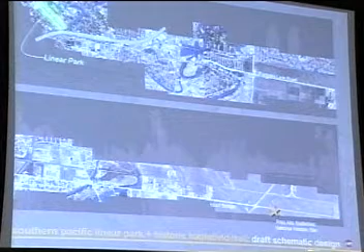There's the linear park. You can see it's right at the west side of the expressway. Then once you go through some curves near Vermilion and Boca Chica, it's pretty much a straight shot.

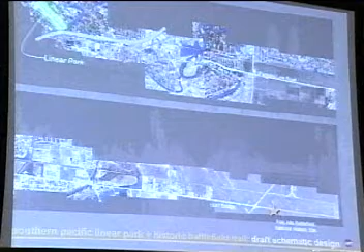The trail is a 12-foot wide paved trail that will allow for two-way traffic. It has an asphalt surface and accommodates bicyclists, walkers, joggers, rollerbladers, as well as skateboarders. It's an especially important project for skateboarders since they have very few legal places in the city where they can skateboard.

In the late 1990s, we had a young skateboarder, in the early evening hours, get hit and killed on Coffeeport Road. It will be very beneficial that we have a facility we can offer as a safe place for people to do all of those activities that I mentioned.

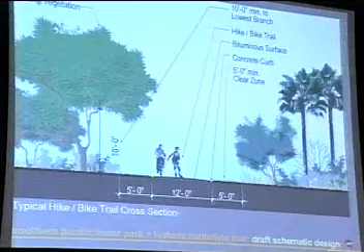This particular slide talks about a concrete curb. We deleted that detail. We will use herbicides to keep weeds from getting under the asphalt—Mr. Brown will explain about that a little later. There will be a 5-foot clear zone, and no shrubbery will be allowed to grow up right next to the trail.

These views show the rest areas. One of the things I need to mention is that the trail conforms to AASHTO standards.

All right, you've heard a lot of acronyms. This may be one to stump you. AASHTO is the American Association of State Highway Transportation Officials. I knew that one. You knew that one, okay. Well,

It's slowed us down a number of times in conforming with AASHTO. The WRT team member who has saved us time and again and helped us has been.

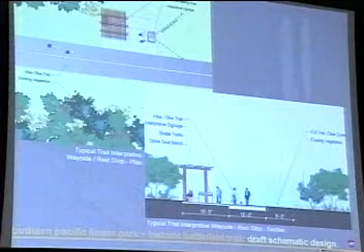I was going to ask you, are they here? WRT? Whoever the city hired? Yeah, the Wallace Roberts and Todd. Okay, the engineer is here. They're the design firm. All right.

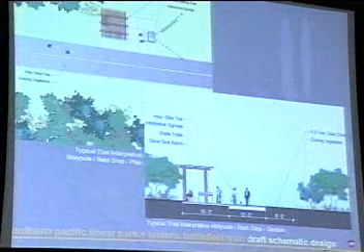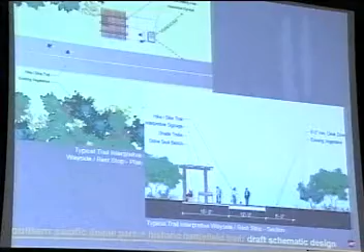But there's a good thing about AASHTO. Even though it has been slowing us down in terms of TxDOT checking for our compliance, it helps the city in terms of liability. In the event that we have an accident and there's a lawsuit, we can say that we have used the AASHTO standards in building this, and those are the recognized standards, so that should show that we've complied and done our due diligence to make it a safe facility. That lowers our legal exposure in that event.

I mentioned the trail rest areas. They feature benches. Some of them will have water fountains. We will build the trellises. We will plant vines, and that'll provide shade. And it's something we need.

This shows a rest area that's near a city street. On local streets, the trail, for instance near Galveston Road, you'll have a stop sign. People on the trail have to stop. They would look both ways, and then they would cross with caution when they cross the street.

At other locations, State Highway 48 or Boca Chica, Price Road, FM 802, FM 3248, the major arterials, we will have traffic signals. There will be push buttons. People could be in a wheelchair, they could push the button and go across.

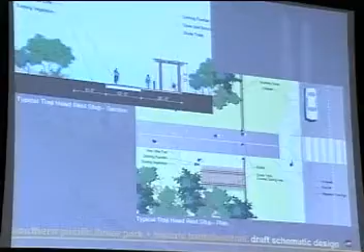The BCIC, or the 4B Corporation, they provided something on the order of $400,000 to fund these traffic signals. The city engineer came to your group, the city commission, and the contract was approved, and they're going to start building those signals soon.

We're not including in that cost figure the cost share on Price Road. The school district will pay for half of that signal, and in exchange we're giving them an easement for some land. They'll have another entrance to their warehouses, get the trucks out of their parking lot, make their facility much safer. So we're thinking in that case, we're not only making it safe at the trail, we're also making BISD's facility on Price Road a safer area.

Mr. Lund: on the intersection, what is being done other than just stripes? Is there anything being done to the intersection? There's signage if you're on the trail, so before you even get to the intersection, there's a warning sign in compliance with AASHTO saying get ready to stop. Typically there's curves that slow people down if you're on a bicycle, because when you're on a bicycle you can go 15 or 20. Before you know it, if you weren't paying attention, you could be headed for trouble.

But on the intersection, you'll have the striping on the road, and I believe in many cases there's signage telling people to have caution for crossing pedestrians. But like at Galveston, in that particular location, it's not far from a corner. So somebody, if they were speeding, could come around the corner and be upon the trail pretty quickly. It's maybe 50, 60 feet from the corner there. So we're going to have to teach people to be careful. You know, but you could be crossing Galveston right now at that same location, and you could get nailed by somebody going too fast. So.

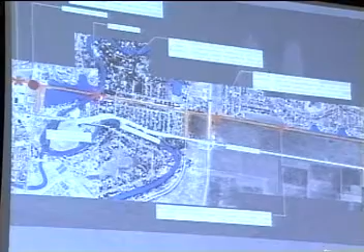The bridges have a width of 14 feet. They'll be prefab items. I should mention that local volunteers, some local historians and other volunteers worked with Doug Murphy

of the National Park Service, along with city staff, on developing interpretive themes, not only about the history of this area and the two battlefields, but also our local wildlife and the resacas, for this trail project. Doug Murphy and Myrna Palfrey, superintendent of the Palo Alto battlefield, secured grant monies to build exhibits and panels that you'll see, which will be given to the city for placement in the trail rest areas.

We call these items wayside exhibits. Thank you again, Myrna, for your help on this item.

And what I'm explaining here is that really the trail is more than just recreation. It is really something that's tied in with the identity of Brownsville.

I get very strong feelings about this because I'm very proud to have worked on this. I put in over about 10 years as the city's heritage officer, so I had the opportunity to learn about our city. When you travel to San Antonio, if you're from the West Coast or the Midwest, people from San Antonio feel very proud of their history.

They take you to the Riverwalk and show it off, acting like citizen promoters of their history. They may or may not take you to the missions, but they'll tell you about the missions. We have something that's just as significant here.

Think of all the U.S. states that came into the United States as a result of the Mexican-American War. We need to educate our young people to be just as proud of their history, to be able to say, when you're near Hibernia Bank on FM 1847, that open area across there is not just a field,

So we won't list them all. All through this process, we've invited the stakeholders from that district and other interested groups to be part of this and give us input as to what's been put together in terms of this project.

The linear park itself is set up with different uses for different areas. Here there's a subtle click that shows you the amphitheater, that yellow object. Then we have a paved area around there, and we'll delineate on the pavement a different paving treatment with tile that will give you the outline of Fort Brown, a star.

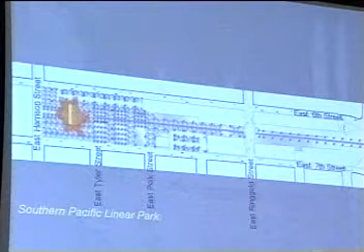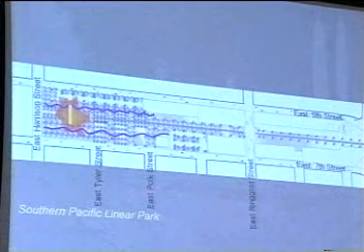That'll give people an idea of some of the history of Brownsville. The squiggly lines are going to be paths, some sidewalks, representing in symbolic form the Rio Grande. This indicates all the trees, and you can see the axis created right in the middle where the trail lines up on axis with the federal courthouse.

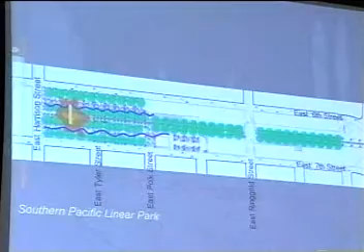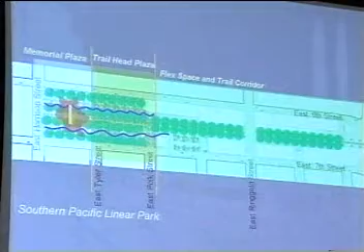All right, let me go back here. I went too far. See the different areas: Memorial Plaza, the Trailhead Plaza where the trail terminates, and the flex space, whether groups want to use that for the Sombrero Festival or other events. That's up to the City Commission.

This zeroes in on the Memorial Plaza. We have informally started to refer to the area as the Vela Garza Memorial Plaza in honor of the late federal judges. The retaining walls of the amphitheater will support plaques. Historic plaques are to be funded by the Brownsville Rotary, containing the names of fallen soldiers, citizens from the Brownsville area who gave their lives serving

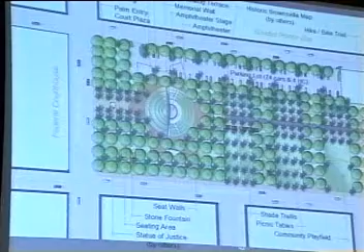in various conflicts or wars defending our nation. We expect that the amphitheater will be used for concerts, theatrical performances, and also for the swearing in of new U.S. citizens. In that regard, the plaques teach a powerful message to the new citizens that the price of freedom has been secured by the sacrifices made by these fallen soldiers.

Also, I want to state for the record for the members of the public that this area is not a veterans park. The city has another park recognizing veterans, many of whom are still alive and well. This area, we should point out, we're going to have benches, we're going to have seating.

Mark, let me stop you real quick. With regards to the amphitheater, and I brought this up at one of the hearings, we want to make sure that all the necessary infrastructure is there with regards to electricity and power supply, so that we don't have a problem setting up speakers, PA systems, whatever the case might be, especially since we're going to be having some performing arts taking place there. Right, yeah, there is electrical, and we double checked on that item. Mr. Holdar checked in on what we need.

The grant pays for the benches. The trees to be planted include palm trees and cedar elms, creating a two-tier canopy effect. There are some existing oaks out there that we can retain.

Also at Ringgold, you can see the drop-off spots, those little areas on Ringgold, that's for the buses to pull over and drop people off. So when we do have an event, it'll make it easier. I should mention also, right on the edge of the screen, you can see where the Neal House is going to be relocated. That parking area there is paid for with the grant. But the Fine Arts Museum is expecting that parking will be open when their facility is open, so there's an issue there in terms of coordination.

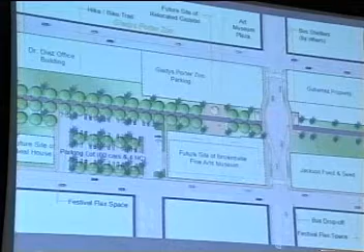There's two other things I want to mention. We hope to acquire a caboose. I know Larry Brown has been up on a trip to Kingsville to look at a caboose up there, and the reason would be that we would use that possibly as a conversion for use as restrooms. We have an issue, we need to get that restroom issue figured out.

The other thing is that there's a railroad scale, and that is an authentic piece of the history. They used to weigh the rail cars out there. We've left that intact, we have not messed with it. It will be left alone, and that's where you could put that caboose, on that railroad scale. And then we could put up a plaque explaining that there was a rail yard there and that they used to weigh the rail cars.

It's the railroad scale on here. It's right about to the above the Neal House, and it's right next to the parking. And I think we cut back on the parking to leave so it wouldn't be hurting that scale. You can walk right past it if you're not paying attention and not notice it. It's right in the ground.

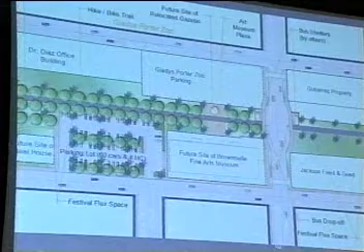How much do we have in parking? I think it's over 100 spaces. Yeah, oh yeah, it's well over, nearly 200, counting both parking lots. Especially on the other lot, that can be for revenue generation, either monthly contracts or we can put in meters. If you go back one slide, you can see the other parking lot, that's adjacent, that's the other parking lot. That's 74 cars, 4 of them handicapped.

I haven't heard anything about the plant nursery. We had a discussion with UTB about using that area to grow plants. TxDOT, when they do the expressway, will do that area where you have to cross 6th and 7th Street. So that is going to be a construction zone that'll have to be done later. I'm going to show you the section cuts.

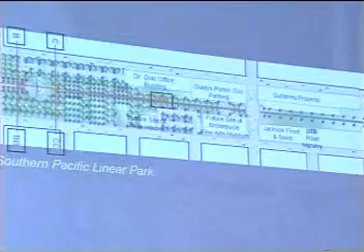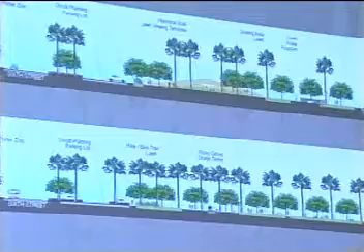This shows AA, if you're on 7th Street looking towards 6th Street. This is if you're on the steps of the federal courthouse looking over in that direction, and the one below is looking further east, as if you have the amphitheater to your back looking towards the expressway. This is looking back at the federal courthouse several years ago.

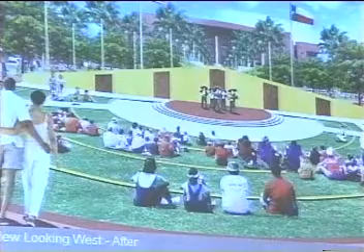This shows the amphitheater. I'd like to mention those are not the final colors—I'm not real fond of those colors. Those show the plaques. And there'll be a sprinkler irrigation system to keep the grass in good shape.

I want to mention some things: the terms of the grant do not allow the city to simply cut out major elements. We can reduce some items—for instance, we could cut down on the number of rest areas to save money, but we cannot simply eliminate all rest areas. The spirit of the grant is that we said we're going to have rest areas, so we're going to have rest areas. You couldn't completely eliminate the amphitheater. If you did, you would forfeit the federal money of the grant.

Second, city staff examined the amphitheater design to see if work could be done by a city crew to possibly save us some money. We ran into three different problems with that scenario. First, the amphitheater work overlaps the work on the other base materials, which affects or limits the contractor's control of the project area—contractors are usually very reluctant to accept that.

Second, there is electrical work specified, so you get into a choreography issue of where the city would stop and the contractor picks up with the electrical. Third, there's a potential issue with meeting the testing requirements that TxDOT requires and the field inspection. We're not saying the city crew isn't capable, but we haven't dealt with TxDOT on that particular role, so we're a little reluctant to predict that we can save money. We recommend going with a TxDOT contractor as the preferred alternative, although the final choice is obviously yours.

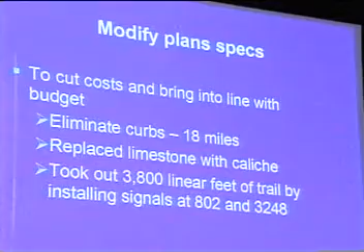Third, we took out about 3,800 linear feet of trail by installing signals at FM 802 and 3248. The original design would have had the trail pulled back at the intersection with the major street, back to where the existing light was. But through the help of the BCIC with funding assistance, by putting those signals in, we were able to save money and take out 3,800 feet of trail.

Those amended plans were then finalized and the project was rebid by TxDOT. TxDOT received bids from 2 contractors. A third contractor was disqualified, although we believe it probably would have been the low bidder. The results of the bid opening showed the TxDOT engineer's estimate prior to bid opening represented the project at $3,127,684, which was about 36% under what the actual bids came in at.

There were 3 bid packages that TxDOT actually received. One bid was by Foremost Paving, with the cost represented there. Second, there was a bid by G&T Paving, again with the amount shown. And third was a potential bid by H2O, but because of paperwork problems, that bid was disqualified. That raised some issues for staff to have to deal with, and quickly.

First, that represented a potential cost increase of $1,940,035 over and above what we had in the budget. Second, we had 48 hours within which to issue a check for that amount and get it to TxDOT, which we could not legally do. We couldn't get to the City Commission that fast, let alone put together how we're going to do that. Why was that requirement of 48 hours on there? Was that on the bids, on the specs, or what?

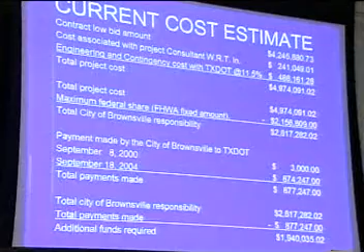The current cost estimate for this project is based upon the latest bids received. The bottom line is an additional funding amount of $1,940,035. How do we propose to pay that bill?

First of all, there is existing in the bank right now, and Mr. Gonzalez can verify that, approximately $500,000 that we can use to offset a portion of the cost of this project without issuing any additional debt.

Second, we propose, and the resolution on your agenda tonight would implement this, the issuance of $1 million CO, Certificate of Obligation. Third, the cost reductions we've been discussing through refinement of the plans, we anticipate $300,000 to $440,000.

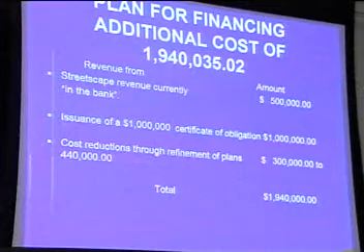We also propose, since we can't tell exactly how much the bids will come in at, that if the City Commission sees fit, there's some flexibility. If the bids come in within say 5%, representing $97,000, should you choose to authorize it, the city manager would be authorized to tell TxDOT to build the project. That would be contained in the authorization should you pass the resolution tonight. We'll be happy to address any questions the commission may have.

What's the time frame for the third set of bids? 60 to 90 days in terms of award by TxDOT. And how soon can you get the bids out? About 30 days.

I'm talking about where we've got a set of plans, we've turned it over to TxDOT. Right now you don't have that because you want to make some changes to it. Actual construction, further refinement, that's correct. Mr. Holdar, who is here this evening, the engineer for the project, will be doing those refinements before the bidding goes out. Any questions, commissioners?

Very well. All right. We would like to conclude, if we could, very briefly with the commission, and I'd like to take the opportunity to introduce Myrna Palfrey. Myrna is the superintendent for Palo Alto National Historic Park.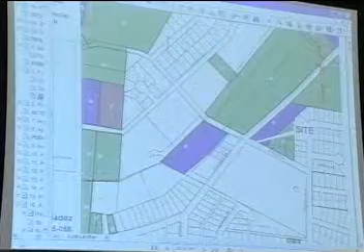Honorable Mayor and City Commission, the property is here shaded in red. This is a proposed site for an apartment complex of no more than 8 units. This is Scheidler Street and Rockwell here. The Planning and Zoning Commission voted unanimously to approve this recommendation to you tonight.

All right, this is a public hearing. Motion to close by Commissioner Arroyo, seconded by Commissioner Longoria. All in favor? Aye. All opposed? Motion carries. Action: move to approve.

Motion to approve by Commissioner Camarillo, seconded by Commissioner Arroyo. All in favor? Aye. All opposed? Motion carries. Item 6, public hearing and action on first reading of ordinance number 235-2005-059-S.

This ordinance would allow a light commercial specific use, used car lot, in a general retail use district for Lot 12 of Block 6 of East Brownsville addition near Southmost Road and 17th Street. Honorable Mayor, this is the lot here for an expansion of a car lot that's already existing. They're adding the additional lot.

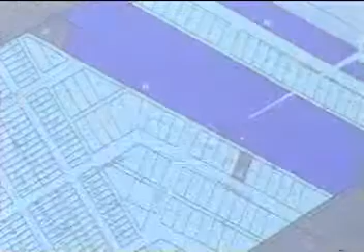This is Southmost Road. This is 14th Street and 18th Street on this side.

The Planning and Zoning Commission voted unanimously to recommend approval of this application. Any questions? This is a public hearing. Move to close. Motion closed by Commissioner Longoria, seconded by Commissioner Camarillo. All in favor? Aye. All opposed? Motion carries.

Action. Move to approve. Motion to approve by Commissioner Longoria, seconded by Commissioner Cisneros. All in favor? Aye. All opposed? Motion carries. Next item. Item 7, consideration and action to adopt resolution number

2005-038 to authorize the commitment of local funding for completion of the statewide transportation enhancement program project known as the Historic Battlefield Trail and Southern Pacific Linear Park.

Mayor, members of the commission, I believe you have a copy of the resolution. Where's Pete? Come back up here, Pete.

Now, is this resolution just to move forward with the project, or does it obligate us with regards to any shortfall in funding?

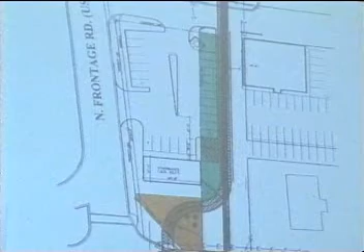I'll make a motion to approve. Okay, we have a motion approved by Commissioner Nettles, seconded by Commissioner Longoria. All in favor? Aye. All opposed? Motion carries.

Get your coffee cups ready. We want Starbucks.

Item 15, consideration and action to award a contract for the purchase of 16 handheld radios for the Brownsville Police Department. At the request of Police Chief Carlos Garcia, the Purchasing Department has solicited proposals from the Houston-Galveston Area Council of Governments for these 16 radios. HGAC has satisfied the state bidding requirements and has existing contracts with the recommended vendors, so the city may make these purchases through our interlocal agreement with HGAC.

Our recommendation this evening is to award a contract for the purchase of 16 XTS 5000 Basic Model 1 handheld portable radios with encryption for the Police Department to Motorola Inc., San Antonio, Texas, for a total price including HGAC's fee of $57,369.60. The funding for this will come through a grant received jointly from the county and the city of Brownsville.

Make a motion to approve, motion approved by Commissioner Nettles, seconded by Commissioner Camarillo. All in favor? All opposed? You guys have to speak up, okay. Everybody seems to be on low this evening. All in favor? Aye. All opposed? Motion carries.